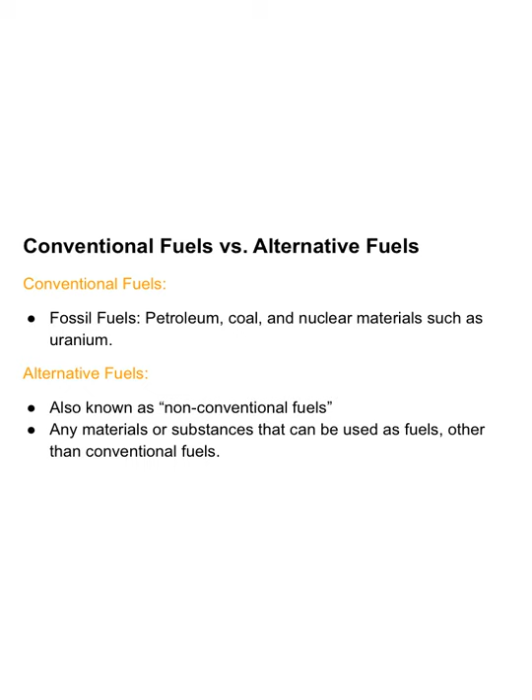The selection of alternative fuels is based on the 3 E's: to become more eco-friendly, more efficient, and more economical. We are looking to these alternative fuels because we know that conventional fuels will eventually run out due to overusage. They also reduce pollution.

They also protect us from global warming. They're cost-effective, non-toxic, and much easier to handle and store.

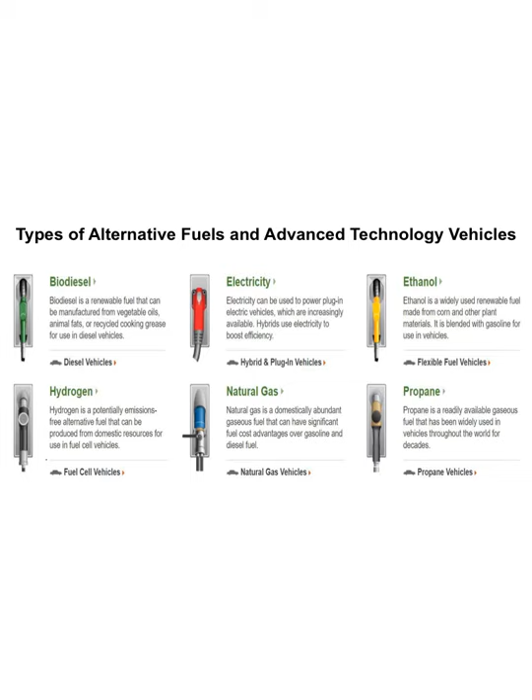The types of alternative fuels and vehicles that we're going to be looking at in today's lesson include blending biodiesel into petroleum diesel vehicles, using electricity to power electric and hybrid vehicles, and blending ethanol into gasoline-powered vehicles. Tomorrow, we'll turn our attention to a few other alternative fuels, including hydrogen, natural gas, and propane, as well as look at their benefits. Let's go ahead and start with biodiesel.

Biodiesel is a domestically produced, renewable fuel that can be manufactured from new and used vegetable oils, animal fats, and recycled restaurant grease. Both biodiesel and petroleum diesel are used to fuel compression ignition engines, but biodiesel is a much cleaner burning renewable alternative.

As a result, using biodiesel in place of petroleum diesel significantly reduces life cycle carbon emissions, and research shows that it also reduces emissions of toxic air pollutants in older on-road vehicles and in many off-road applications.

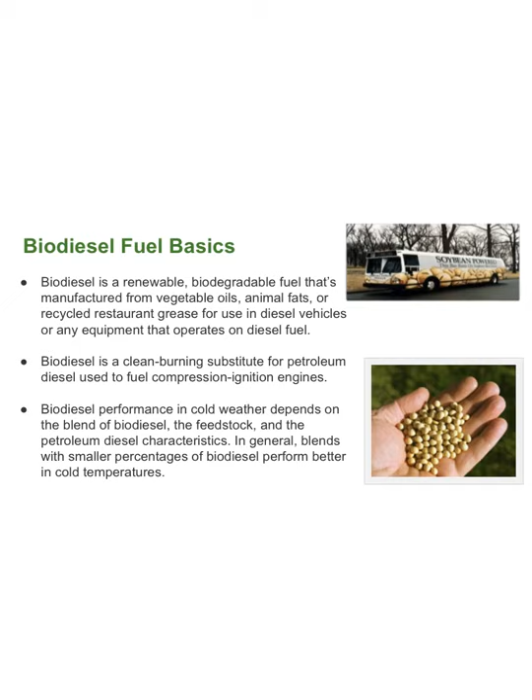One thing to consider is that all diesel and biodiesel blends can have compounds that crystallize in very cold temperatures, causing the fuel to turn into a gel-like substance, causing operability issues if not properly monitored. However, fuel blenders have a number of options available to improve the cold flow properties of biodiesel blends, including adding flow improvers.

So as we continue on with our learning of biodiesel, let's take a look at a few benefits and considerations. First off, biodiesel is produced in the United States and it's used in conventional diesel engines, directly substituting for or extending supplies of traditional petroleum diesel.

It is a clean-burning, renewable substitute for regular petroleum diesel. Using biodiesel as a fuel improves not only its energy efficiency and costs, but it also improves the air quality, the environment, and it provides a variety of safety benefits.

In regards to energy and cost, using biodiesel and other alternative fuels and advanced technologies to reduce fuel consumption continues to reduce transportation energy costs for businesses and consumers alike. Soybean biodiesel has a positive energy balance, meaning that soybean biodiesel yields 4.56 units of energy for every unit of fossil fuel energy consumed over its life cycle.

In regards to air quality, using biodiesel reduces life cycle emissions because carbon dioxide released from biodiesel combustion is offset by the carbon dioxide absorbed from growing soybeans or other feedstocks used to produce the fuel.

Life cycle analysis completed by Argonne National Laboratory found that biodiesel in its purest form can reduce carbon dioxide emissions by 74% compared with petroleum diesel.

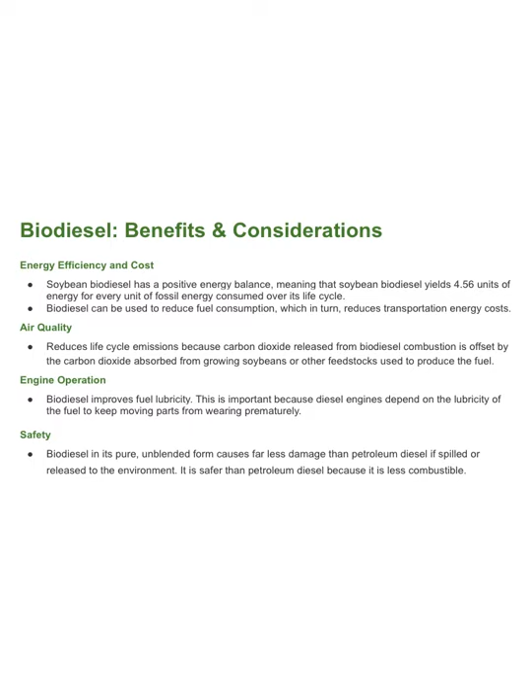Biodiesel is safer than petroleum diesel because it is less combustible. The flash point for biodiesel is higher than 130 degrees Celsius compared to about 52 degrees Celsius for petroleum diesel. This implies biodiesel is less of a fire hazard and therefore safer to handle, store, and transport.

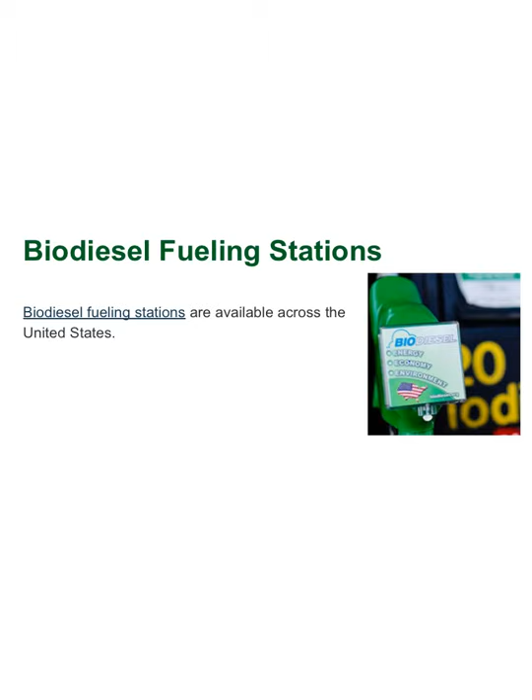There are a growing number of biodiesel fueling stations available across the United States. You can take a moment and use the link on this page to view the locations of these alternative fuels, including biodiesel.

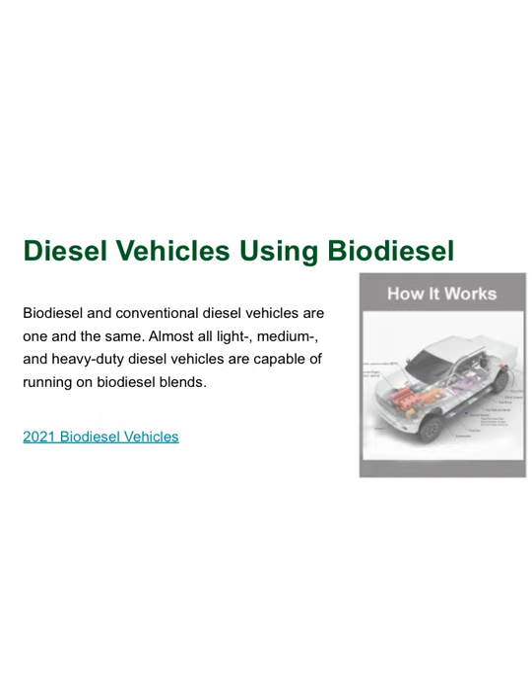Biodiesel and conventional diesel vehicles are one and the same. Almost all light, medium, and heavy-duty diesel vehicles are capable of running on biodiesel blends. Take another moment to click on the link to view the fleets of biodiesel vehicles that are in production for the year 2021.

Let's turn our attention to electricity and see how it can be applied to electric vehicles. Recall that electricity can be produced from a variety of energy sources. We saw it could be produced from oil, coal, nuclear energy, hydropower, natural gas, wind, solar, and even stored hydrogen.

Plug-in electric vehicles, the collective term for plug-in hybrid electric vehicles and all-electric vehicles, are all capable of drawing electricity from off-board electrical power sources and storing it in their batteries. In plug-in electric vehicles, onboard rechargeable batteries store energy to power one or more electric motors. Vehicles that run only on electricity produce no tailpipe emissions.

Fueling these plug-in electric vehicles with electricity is currently cost-effective compared to using gasoline, but they typically cost more to purchase. However, initial vehicle costs can be offset by fuel cost savings, a federal tax credit, and even statewide incentives.

Many owners of plug-in electric vehicles choose to do the majority of their charging at home or at fleet facilities in the case of commercially owned fleets. Some employers offer access to recharging at the workplace. In many cities, plug-in electric vehicle drivers also have access to public charging stations in a variety of places, such as shopping centers, public parking garages and lots, hotels, and gas stations and businesses. Charging infrastructure is rapidly expanding, providing drivers with the convenience, range, and confidence to meet more of their transportation needs with plug-in electric vehicles.

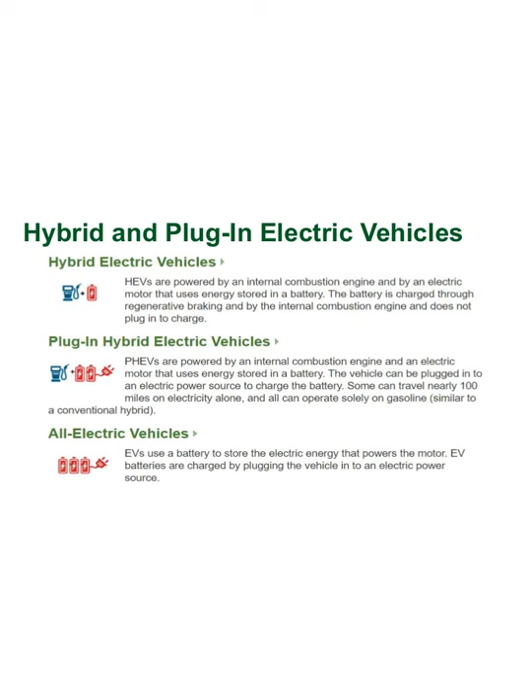Today's hybrid electric vehicles are powered by an internal combustion engine in combination with one or more electric motors that use energy stored in batteries. These hybrid electric vehicles combine the benefits of high fuel economy and low tailpipe emissions with the power and range of regular conventional vehicles. A wide variety of hybrid electric models are currently available.

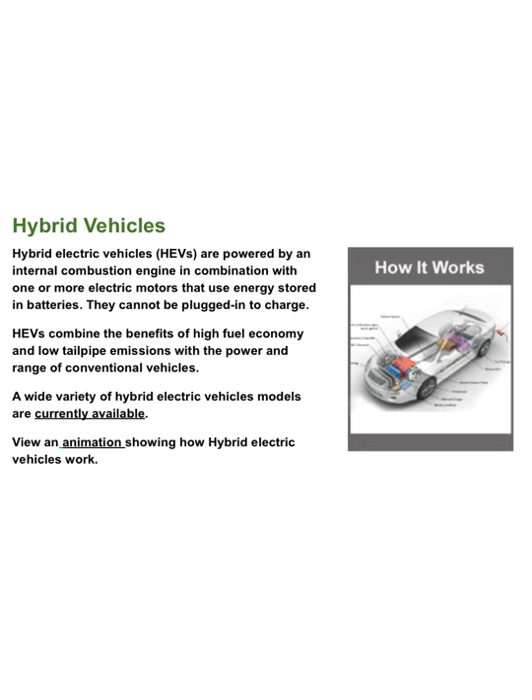Plug-in hybrid electric vehicles use batteries to power an electric motor and use other fuels such as gasoline or diesel to power an internal combustion engine or other propulsion source.

Using electricity from the grid to run the vehicles some or all of the time reduces operating costs and fuel use relative to conventional vehicles. Plug-in hybrid electric vehicles may also produce lower levels of emissions depending on the electricity source.

There are several light-duty plug-in hybrid electric vehicles commercially available, with medium-duty vehicles now entering the market as well. Both medium and heavy-duty vehicles can also be converted to plug-in hybrid electric vehicles, but at a higher cost. Although plug-in hybrid electric vehicles are generally more expensive than similar conventional and hybrid vehicles, again, these costs can be saved through federal and state incentives.

Plug-in hybrid electric vehicles have an internal combustion engine and an electric motor, which uses energy stored in the batteries. They generally have a larger battery pack than hybrid electric vehicles. This makes it possible to drive moderate distances using just electricity, about 10 to 50 plus miles in current models, commonly referred to as the electric range of the vehicle.

For example, during urban driving, most of the plug-in hybrid electric vehicle's power can come from the stored electricity. A light-duty plug-in hybrid electric vehicle might drive to and from work on all-electric power, plug the car in to charge at night, and be ready for another all-electric commute the next day.

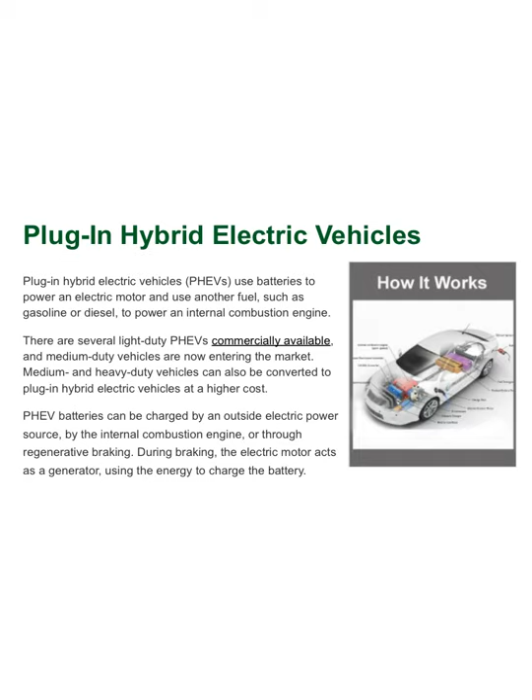Plug-in hybrid electric vehicles' fuel consumption depends on the distance driven between battery charges. For example, if the vehicle is never plugged in to charge, fuel economy will be about the same as a similarly sized hybrid electric vehicle. If the vehicle is driven a shorter distance than its all-electric range and plugged in to charge between trips, it may be possible to use only electric power.

All electric vehicles use a battery pack to store the electrical energy that powers the motor. Their batteries are charged by plugging the vehicle into an electric power source. Although electricity production may contribute to air pollution, the U.S. Environmental Protection Agency categorizes all electric vehicles as zero-emission vehicles because they produce no direct exhaust or emissions. Both heavy-duty and light-duty electric vehicles are commercially available.

You can go ahead and select this link to see what those are.

As I've stated before, all electric vehicles are typically more expensive than conventional or even hybrid vehicles, but the cost can be recovered through fuel savings and federal and state incentives.

Today's all-electric vehicles generally have a shorter range per charge than comparable conventional vehicles have per tank of gas. The efficiency and driving range of all-electric vehicles varies substantially based on driving conditions. Extreme outside temperatures tend to reduce range because more energy must be used to heat or cool the cabin. High driving speeds reduce range because of the energy required to overcome increased drag. Compared with gradual acceleration, rapid acceleration will also reduce range. Hauling heavy loads or driving up significant inclines can also reduce range.

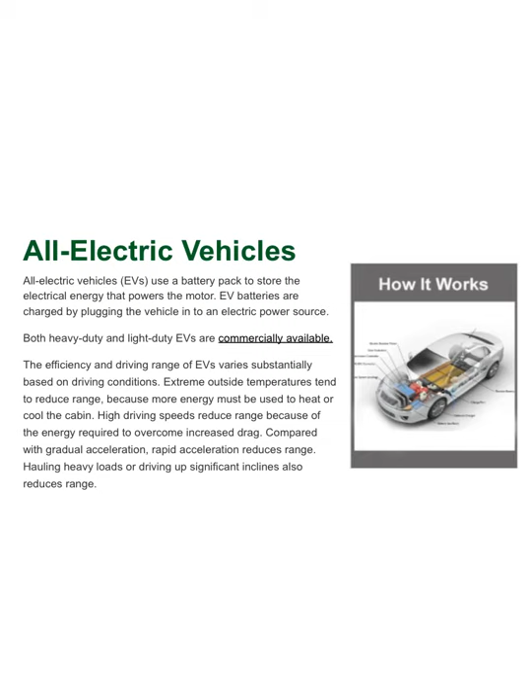And finally, let's turn our attention to ethanol. Ethanol is a renewable fuel made from various plant materials, collectively known as biomass. More than 98% of U.S. gasoline currently contains ethanol to oxygenate the fuel, which reduces air pollution.

There are several steps involved in making ethanol available as a vehicle fuel. First, biomass feedstocks are grown, collected, and transported to an ethanol production facility. Those feedstocks are then converted to ethanol at a production facility and transported to a fuel terminal or end user by rail, truck, or barge. Ethanol is then blended with gasoline at the fuel terminal to make either E10, E15, or E85. All three of these are different blends of ethanol and gasoline, and they're distributed by truck to the fueling stations.

Ethanol's impact on fuel economy is dependent on the ethanol content in the fuel and whether an engine is optimized to run on the gasoline or the ethanol.

Let's go ahead and look at the benefits and considerations of using ethanol. A gallon of ethanol contains less energy than a gallon of gasoline, resulting in lower fuel economy when operating your vehicle. The impact on fuel economy varies depending on the energy difference in the blend used.

Ethanol also has a higher octane number than gasoline, which provides increased power and performance. Ethanol production also creates jobs in rural areas where employment opportunities are needed. According to the Renewable Fuels Association, ethanol produced in 2019 accounted for more than 68,600 direct jobs across the country, $43 billion to the gross domestic product, and $23 billion in household income.

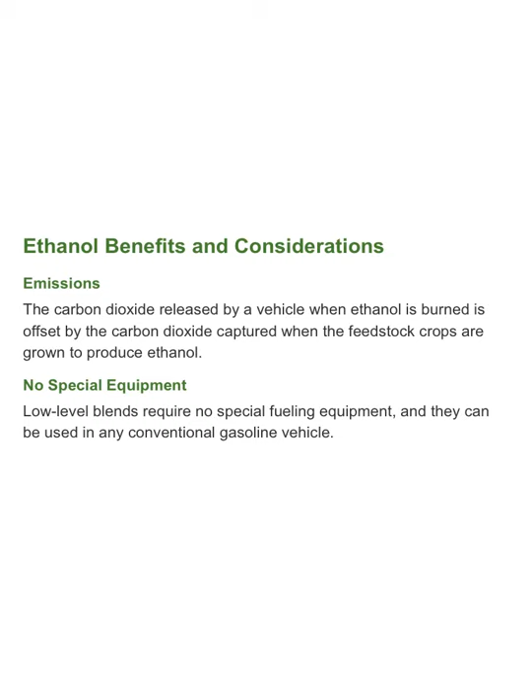Lower level blends require no special fueling equipment, and they can also be used in conventional gasoline vehicles. Fuel providers can offer E15, E85, and other ethanol gasoline blends. E85 and E15 are available at over 3,500 and 2,000 fueling stations, respectively. The alternative fueling station locator allows users to search for public and private E85 fuel stations.

To see where those alternative fueling station locators are, go ahead and select this link.

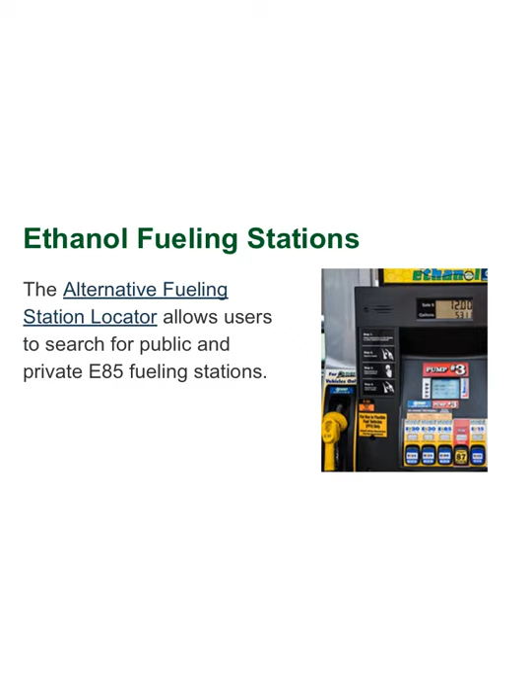The vehicles that are able to blend both gasoline and ethanol together are called flexible fuel vehicles. Flexible fuel vehicles have an internal combustion engine and are capable of operating on gasoline and any blend of gasoline and ethanol up to 83%. E85 or flex fuel is a gasoline ethanol blend containing 51% to 83% ethanol, depending on geography and season.

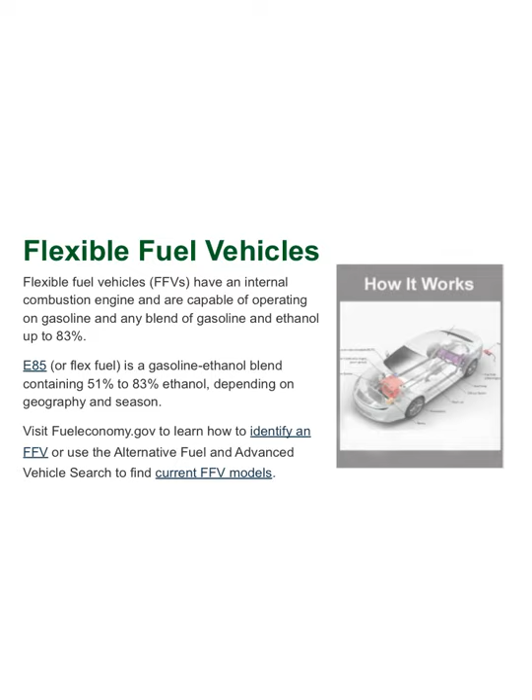According to data gathered in 2017, there were more than 21 million flexible fuel vehicles in the United States. Because these cars are factory made and are capable of operating on gasoline and gasoline ethanol blends, many vehicle owners don't realize that their car is actually a flexible fuel vehicle and that they have the choice of fuels to use. Go ahead and visit fueleconomy.gov to learn how to identify any flexible fuel vehicles or use the alternative fuel and advanced vehicle search to find current flexible vehicle models.

With hybrid vehicles, they're powered by two or more fuels. The most common type of hybrid vehicles have electric drivetrains, which are powered by a battery. When this battery depletes, the internal combustion engine acts as a generator to recharge the battery. And then all-electric vehicles are powered entirely by rechargeable batteries and have electric powertrains.